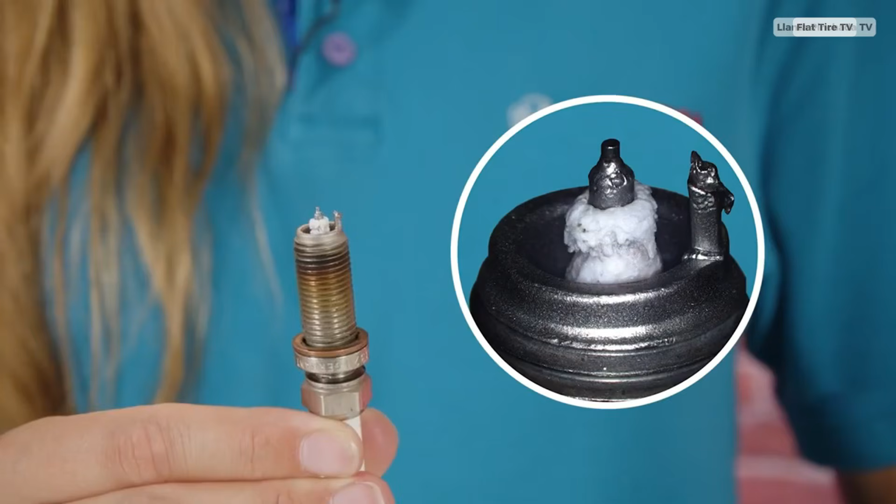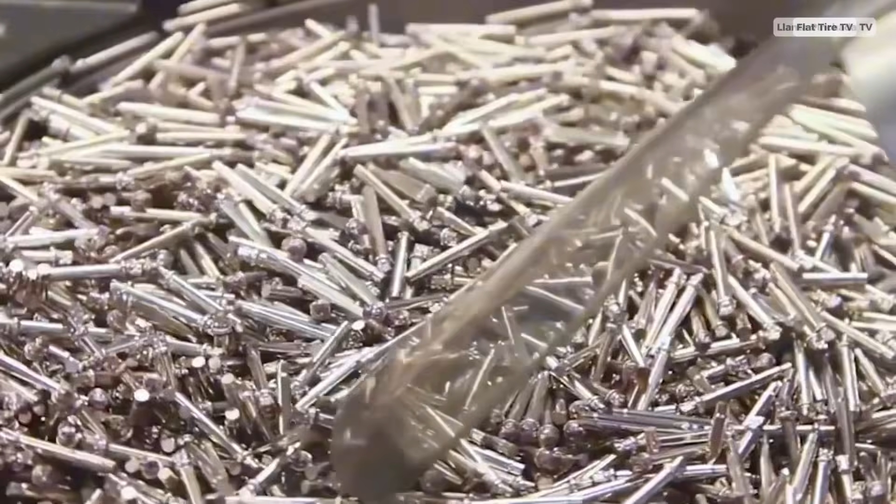Choosing between expensive or cheap spark plugs might seem like a simple decision, but in reality, it's one of those topics where most people think they understand the difference and end up getting it wrong, because there's a common belief that paying more automatically improves engine performance.

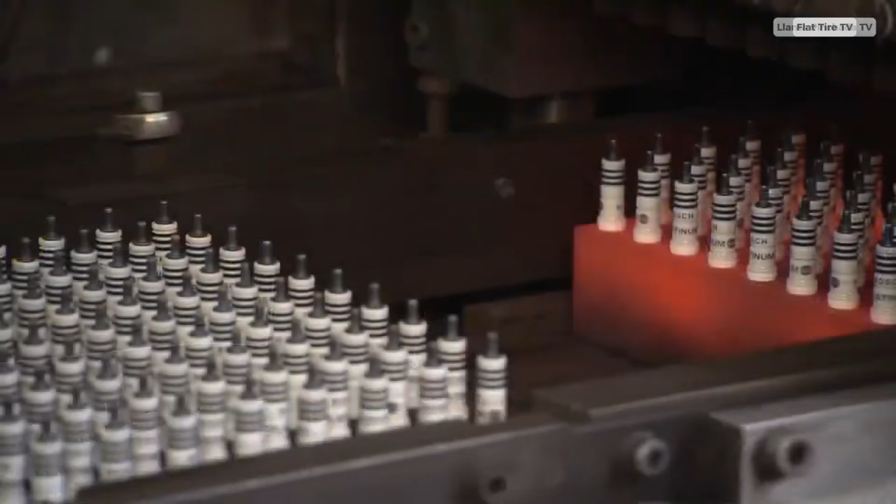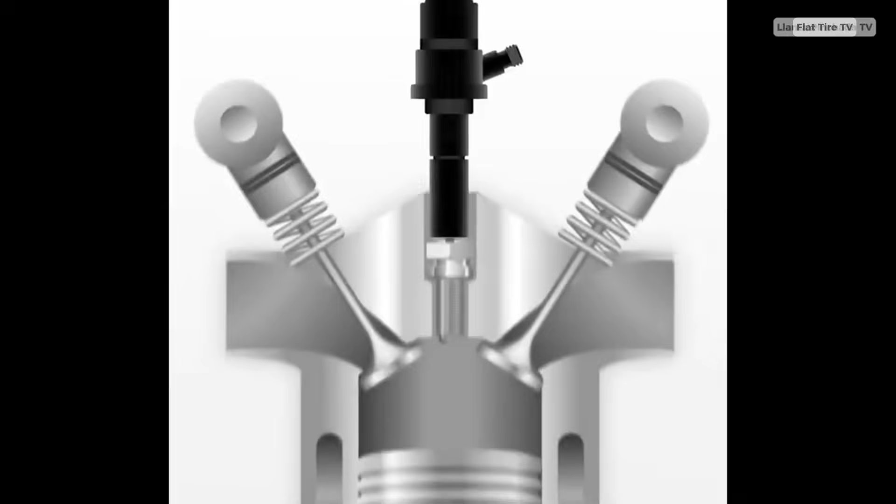So in this video, I'm going to explain whether it's actually worth spending more, how spark plugs really work, what changes between different types, and the clear signs that they're no longer working properly. Stay until the end, because I'll show you something almost no one checks when replacing them, and how to fix it, since it can ruin performance, increase fuel consumption, and cause brand new spark plugs to fail prematurely.

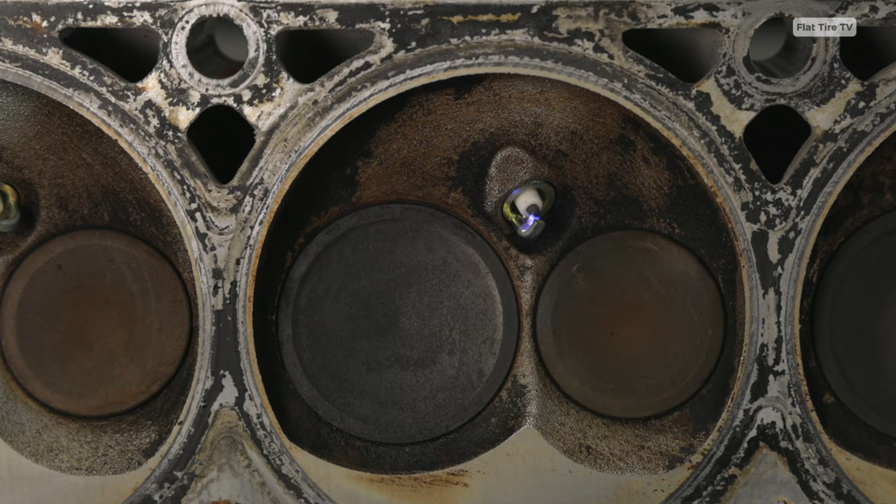Inside the cylinder, the engine compresses a very precise mixture of air and fuel. That mixture cannot ignite at just any moment or in any way, because if the spark arrives late, weak, or poorly positioned, the explosion won't push the piston the way it should.

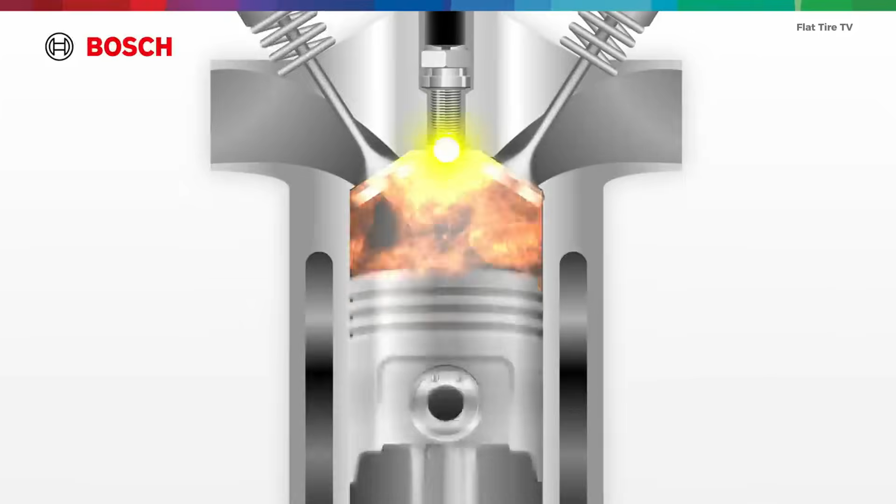That's where the spark plug comes in. It generates a discharge of thousands of volts that jumps between its electrodes, creating a microscopic flame kernel that then expands and burns the entire mixture.

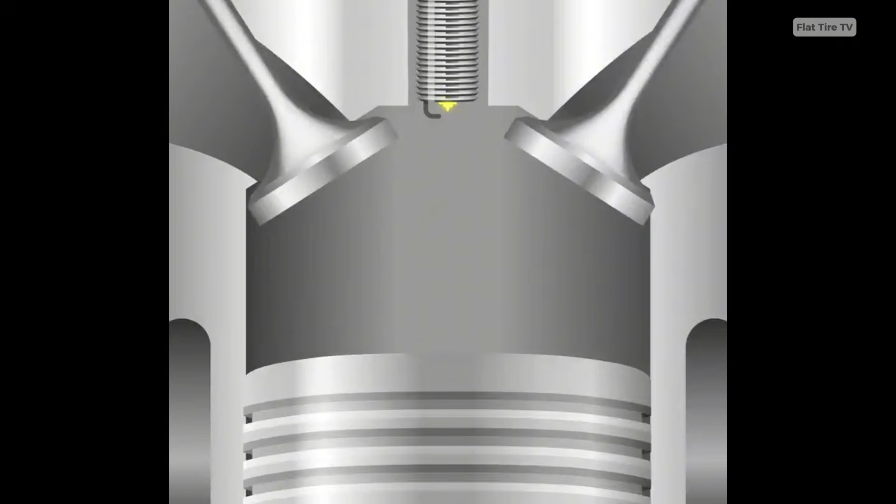But the spark plug doesn't just create a spark, it also controls heat inside the cylinder. If it doesn't dissipate heat properly, it can overheat and cause pre-ignition, where the mixture ignites too early, hitting the piston and damaging the engine without the driver immediately noticing.

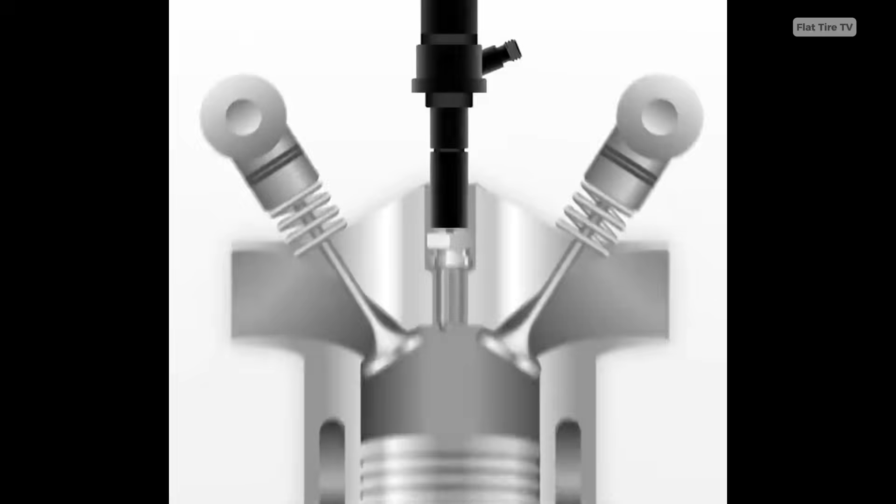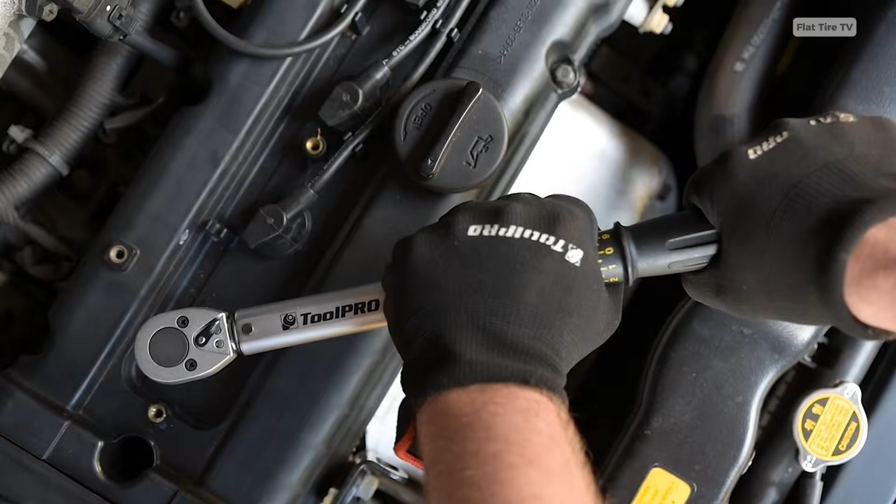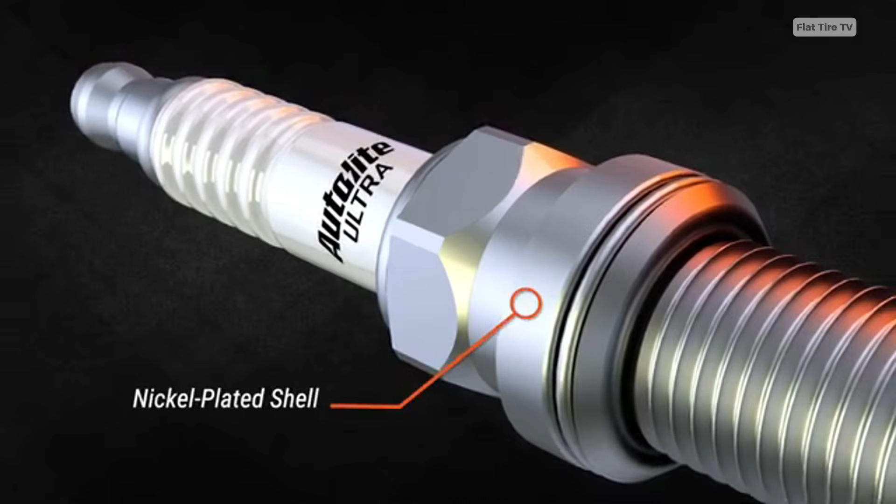In modern engines, this becomes even more critical, because the vehicle's ECU, engine control unit, expects a precise spark to match its fuel injection and ignition calculations. When the spark plug doesn't perform correctly, the ECU tries to compensate, but it can't fix a bad spark. It can only burn more fuel to mask the problem.

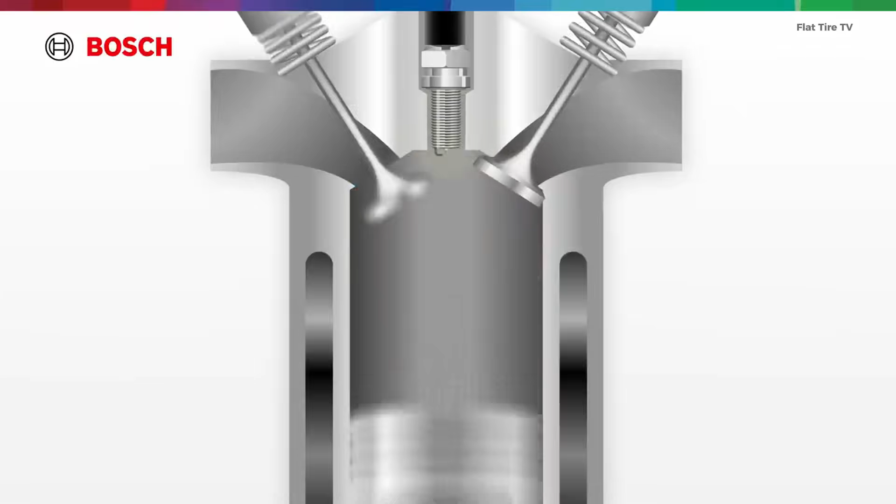Everything starts at the top, where the ignition coil or wire connects. It may seem simple, but it's crucial. It's where the high voltage enters. If the contact isn't solid or is dirty, the current won't arrive cleanly, and the spark loses strength before it even forms.

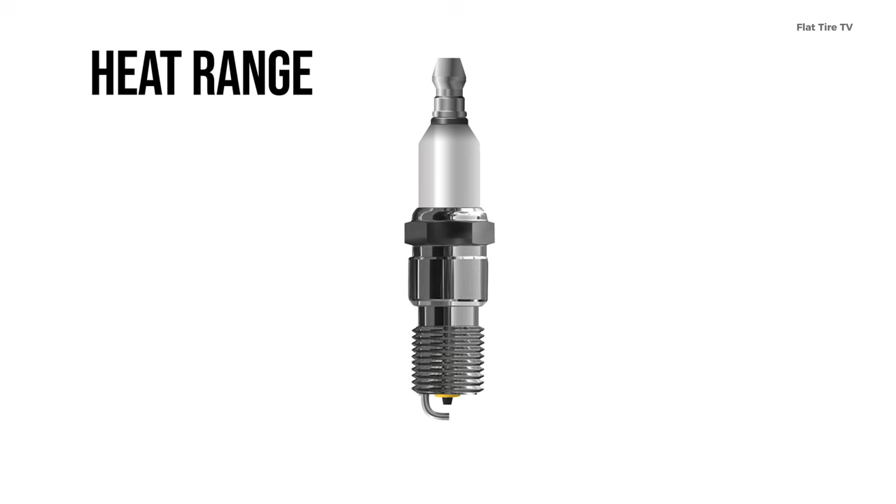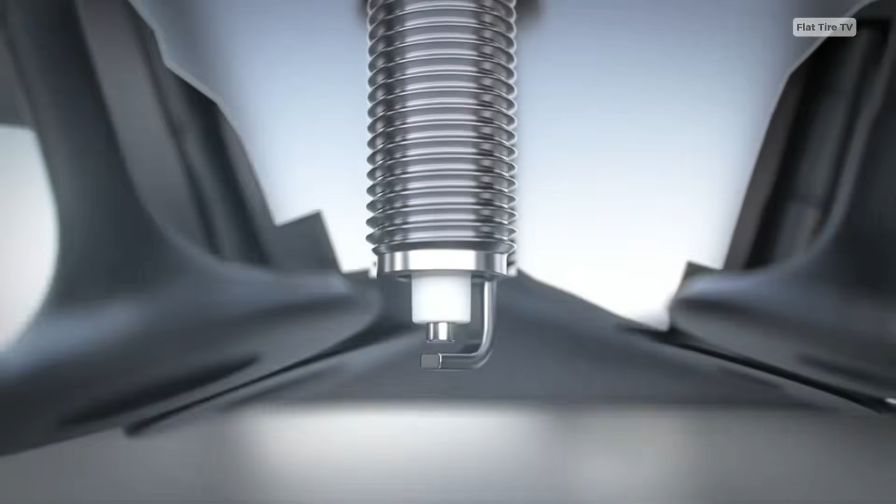From there, the electricity travels down the central electrode, which runs through the body of the spark plug. This electrode isn't exposed. It's protected by a ceramic insulator that serves two critical purposes: preventing current leakage and maintaining thermal stability. If that insulator cracks, gets contaminated, or dirty, the spark can deviate, and the cylinder may start misfiring without a clear warning.

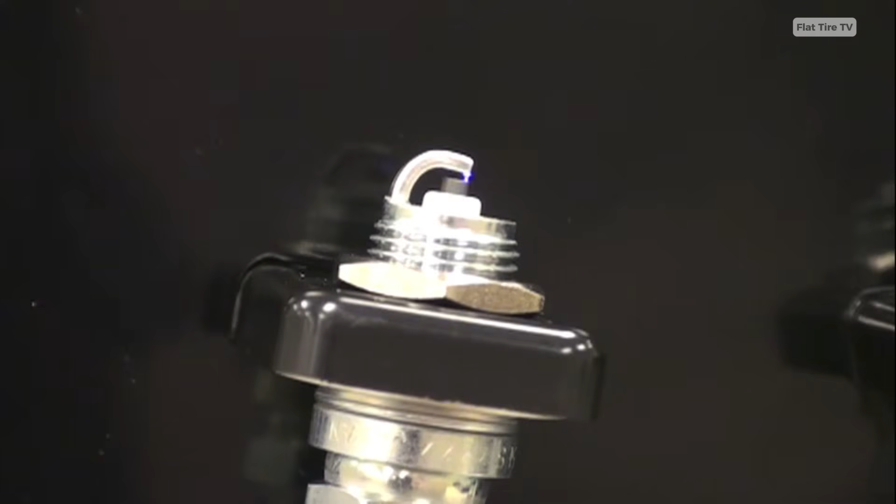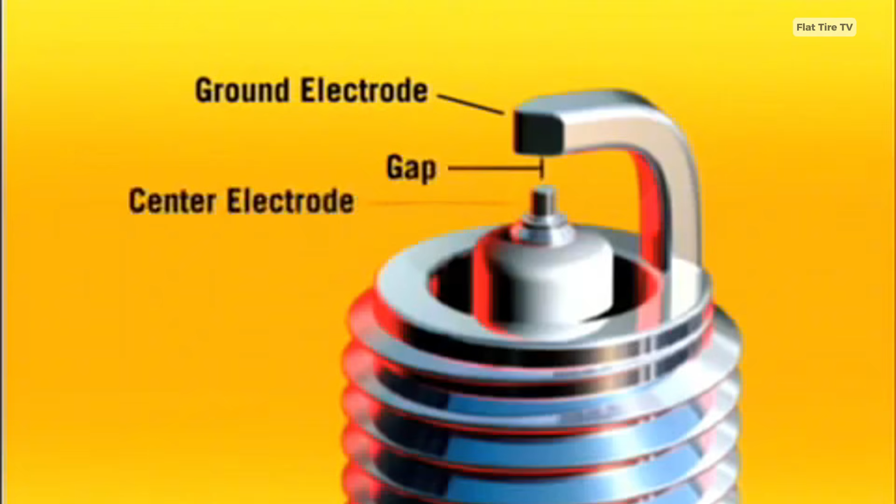The metal body of the spark plug is more important than it seems. It doesn't just secure the plug in place, it also transfers heat to the cylinder head. If heat isn't dissipated properly, the plug overheats and can trigger pre-ignition or detonation, two of the most dangerous conditions for an engine.

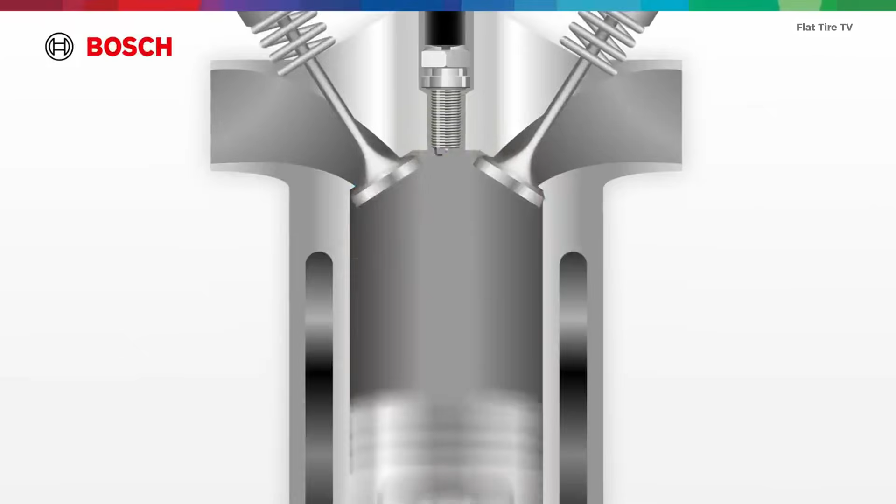At the tip is the ground electrode, the destination of the spark. Its position determines where the spark jumps and how the flame begins. If it's bent, worn, or misaligned, the spark forms incorrectly, even if voltage is present.

And between the central electrode and the ground electrode is where everything happens. The gap, that tiny space, is literally where combustion is decided, whether it starts clean and efficient or flawed and problematic.

From the outside, all spark plugs look the same, and that's exactly the problem. Many people think switching types is just about price, when in reality, each type changes how the engine burns fuel.

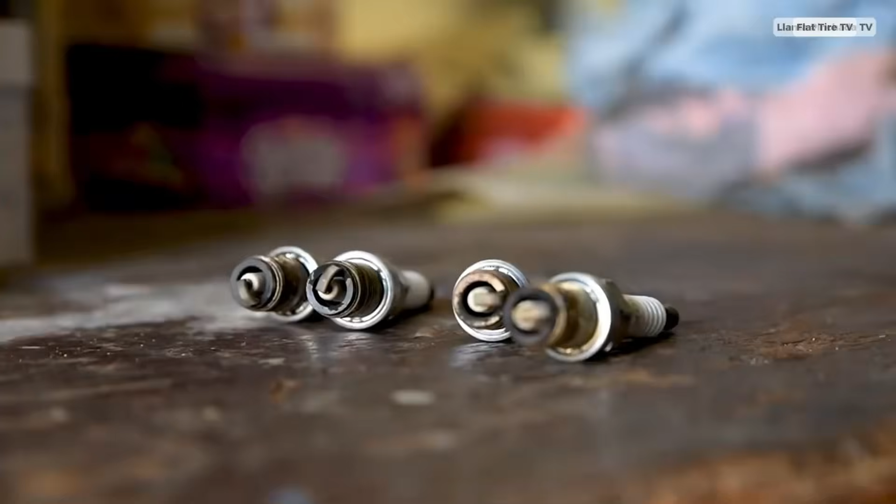Conventional spark plugs, the most common and cheapest, use copper or nickel electrodes. They work well, produce a proper spark, and do their job, but they wear out quickly. As mileage increases, the electrode gradually erodes, the spark becomes larger but less precise, and the engine slowly loses efficiency without warning. They don't fail suddenly, they just make the car consume more fuel and respond worse over time.

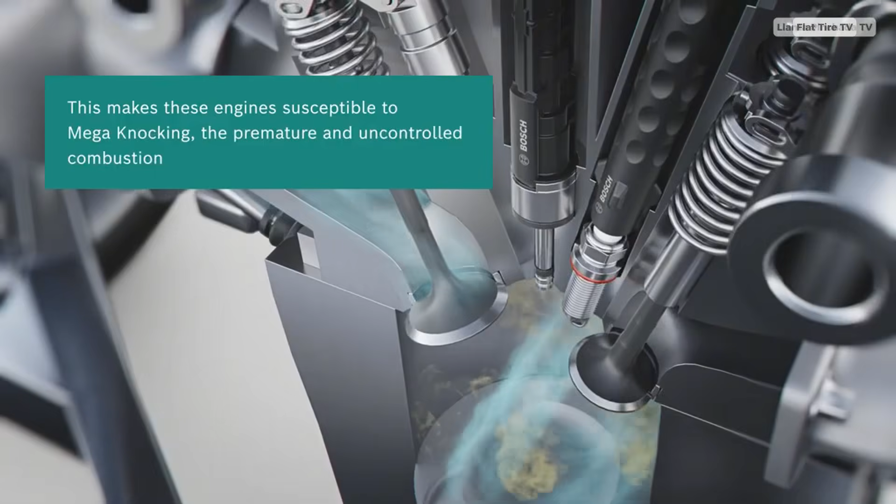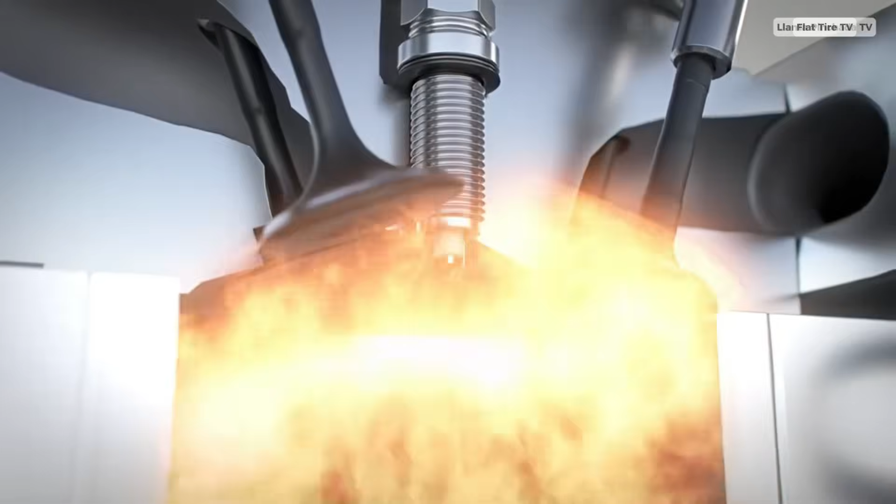Then there are platinum spark plugs, which many people believe are more powerful, when in reality their main advantage is stability. Platinum resists heat and wear better, keeping the spark more consistent over a longer period. The engine feels the same for more miles, but that doesn't mean the car will automatically be faster or more efficient. It means it won't degrade as quickly as with basic plugs.

Double platinum spark plugs are designed for specific ignition systems, especially those where the spark jumps in both directions.

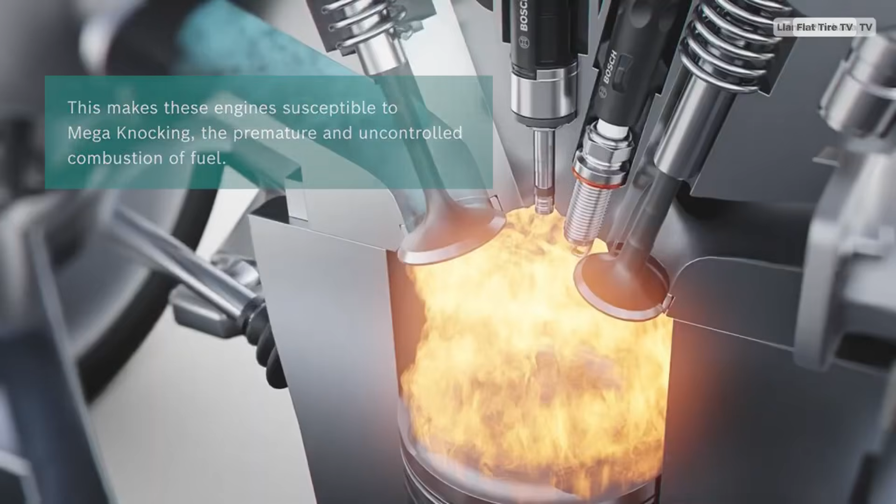Using them in an engine that doesn't require them offers no real benefit, but not using them where they are required can accelerate wear in the ignition system. This is one of the most common mistakes in workshops that install whatever is available.

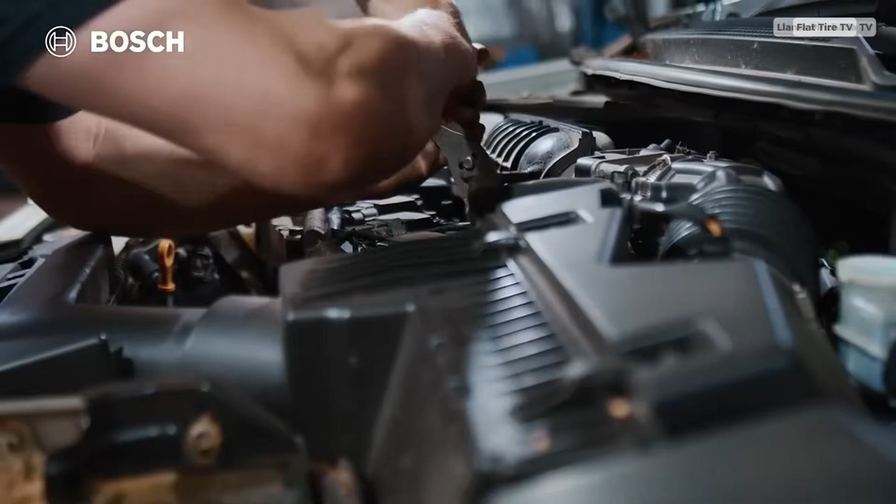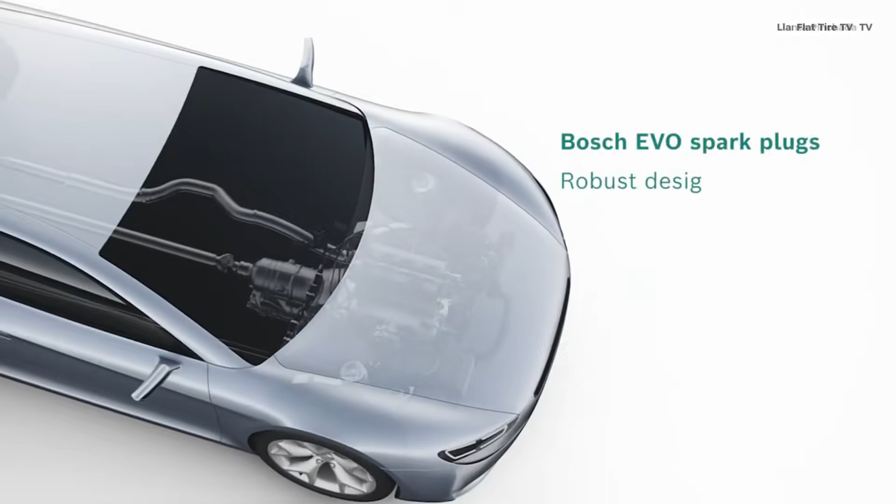Iridium spark plugs are the most misunderstood. Many people buy them expecting more power or better fuel economy, when in reality, iridium allows for a finer and more stable spark, especially in modern engines with high compression and precise electronic control. If the engine is designed for them, they work perfectly. If not, the benefit is minimal or sometimes non-existent.

Four real symptoms of faulty spark plugs that most people overlook.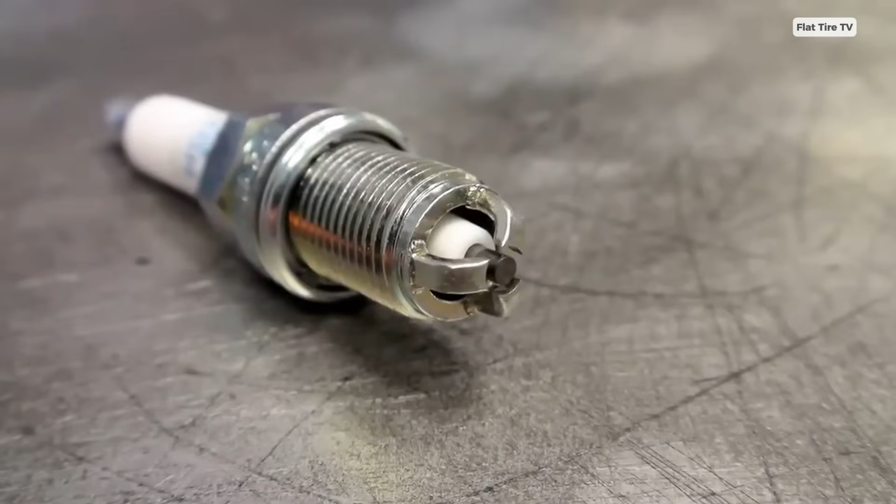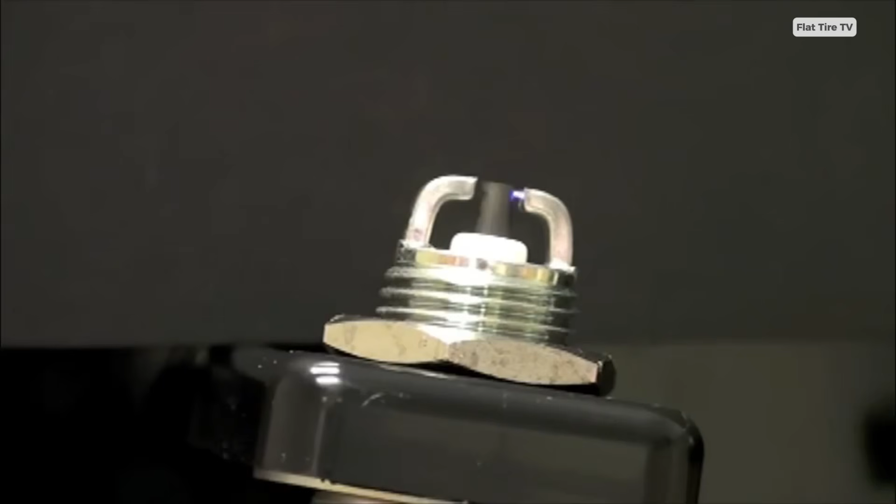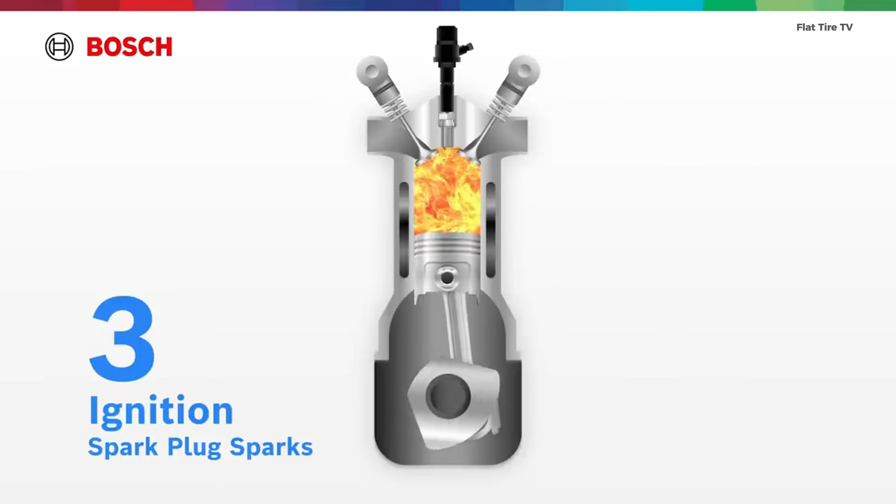The first symptom almost always appears during startup, and it's one of the most ignored. When spark plugs begin to fail, the engine needs more effort to start, especially when cold. It's not that it won't start, it does, but it takes a little longer. The engine cranks an extra second, or it just doesn't feel as clean. This happens because the spark is no longer strong enough to ignite the compressed mixture on the first try, so the fuel injection system compensates by adding more fuel. The driver gets used to it, but every start like this is already an inefficient combustion from the very first engine rotation.

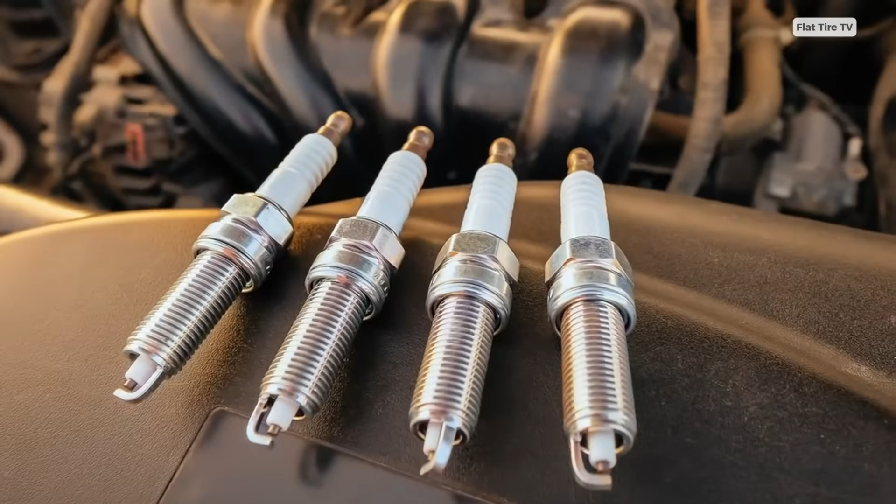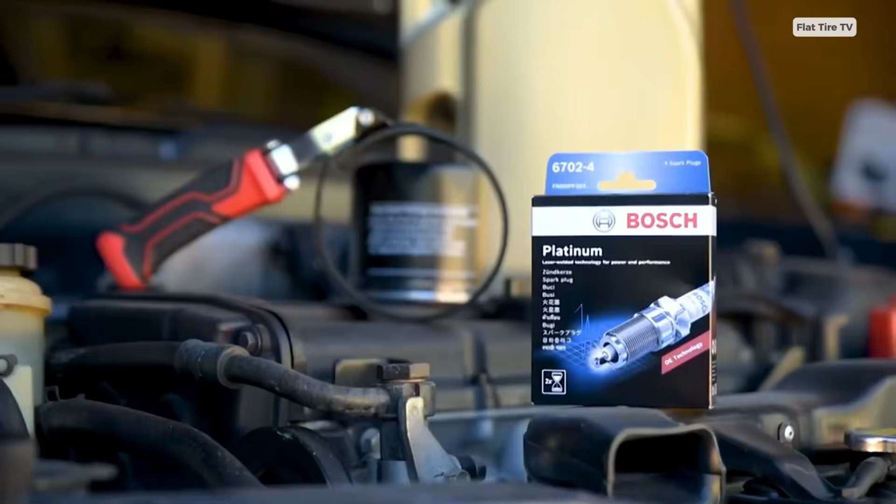The second symptom shows up during acceleration, especially from low RPM. The car responds, but with a kind of delay, as if it hesitates before reacting. It's not a total lack of power, it's an irregular delivery. This happens because one or more spark plugs aren't igniting the mixture consistently, so some cylinders push hard while others don't. The result is less clean, less direct acceleration, with a heavy engine feel, even though the problem may be less noticeable at highway speeds.

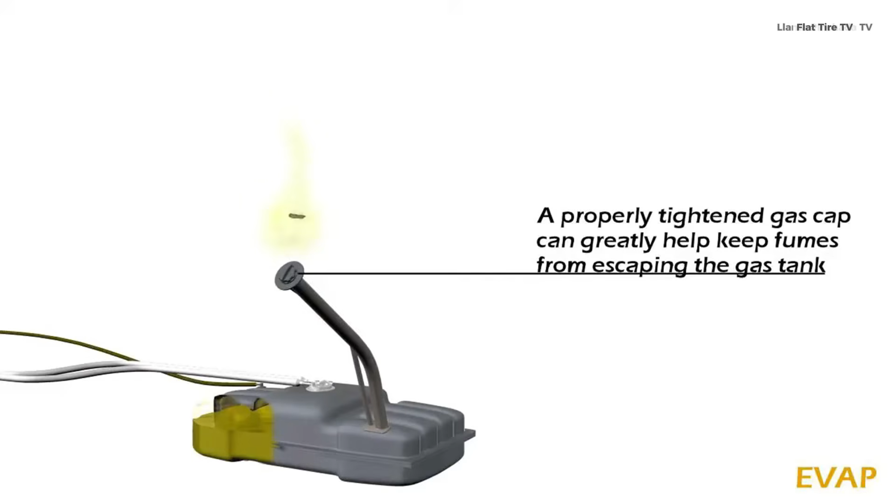The third symptom is one of the most expensive in the long run: a gradual increase in fuel consumption. When the spark is weak or unstable, the mixture doesn't burn completely, and the vehicle's computer detects this through the oxygen sensors. What does the system do? It injects more fuel to try to maintain performance. The driver doesn't feel a clear failure, just notices that the tank empties faster, often blaming traffic or driving style, when in reality extra fuel is being burned to compensate for worn spark plugs.

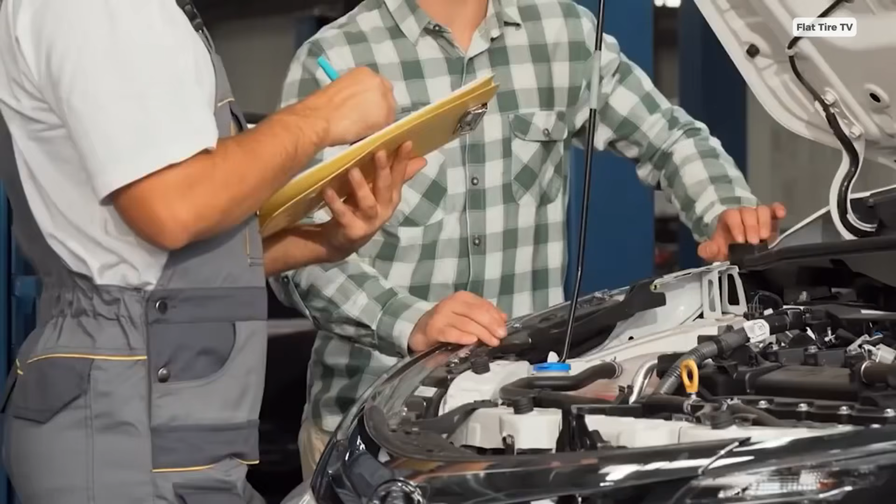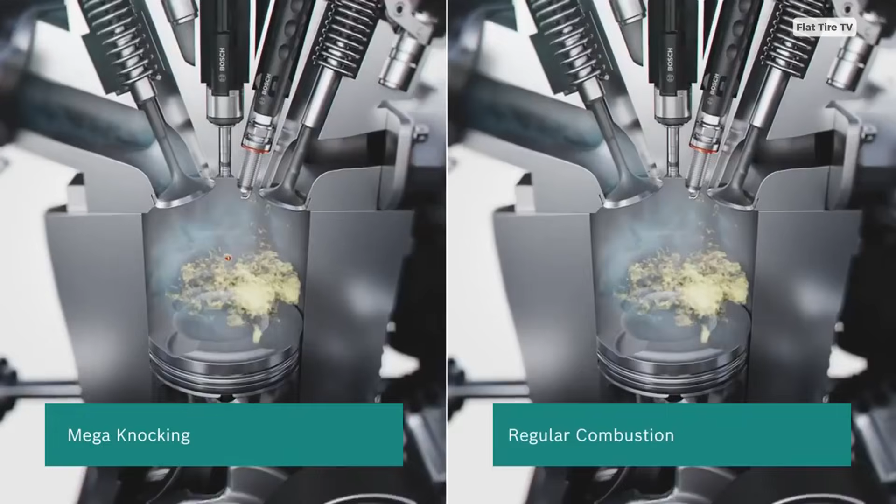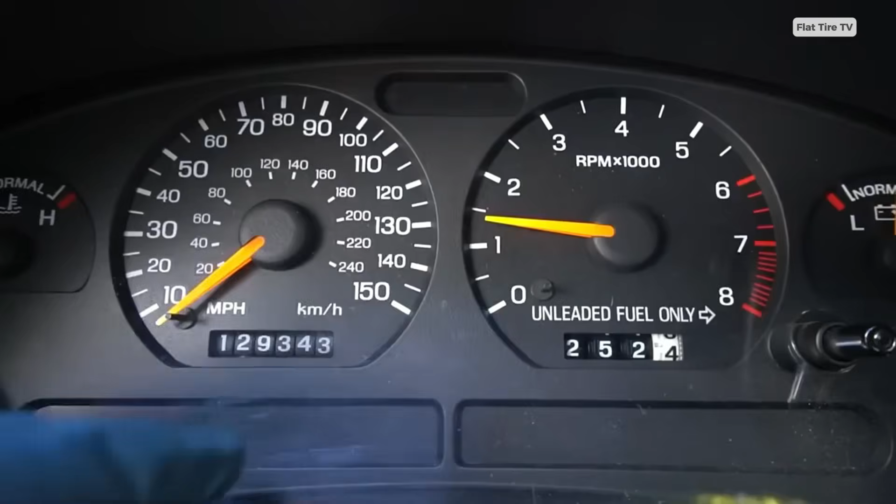The fourth symptom appears at idle, when stopped at a traffic light or parked. Light but constant vibrations. It's not a strong shake, but a subtle vibration that makes the engine feel slightly uneven. This happens because combustion isn't uniform across all cylinders. Some explosions are complete, others aren't, and that imbalance is transmitted directly to the engine block. Many people think all cars vibrate a little, but when spark plugs are in good condition, idle should be smooth and stable.

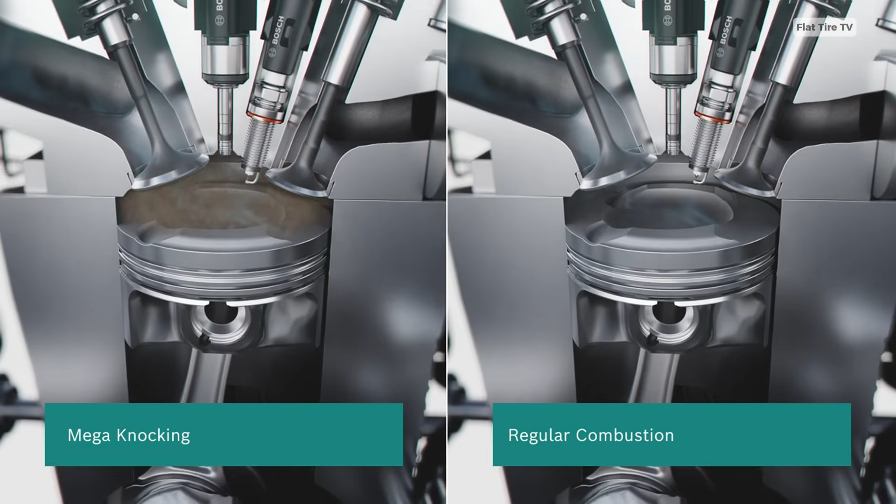The first mistake, and the most common, is believing that all spark plugs are the same as long as they fit. Every engine is designed to work with a specific type of spark plug, with a defined material, a precise heat range, and a particular spark shape. Changing that doesn't just work the same, it alters how the engine behaves.

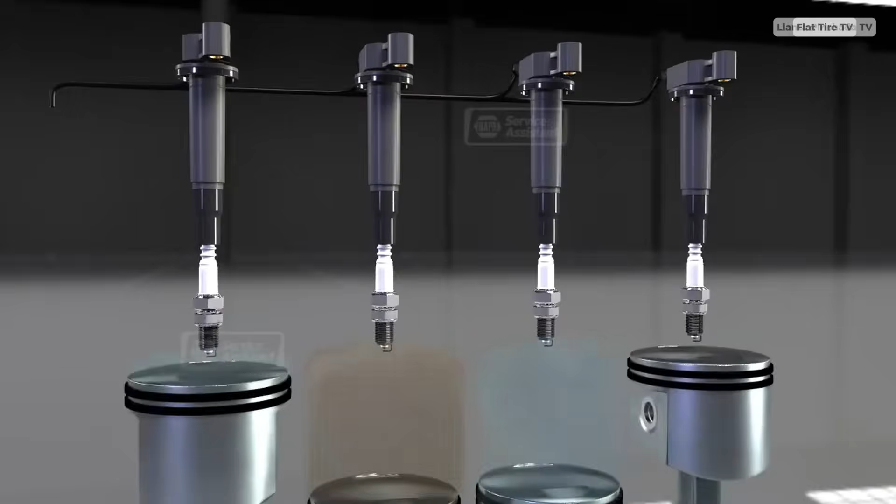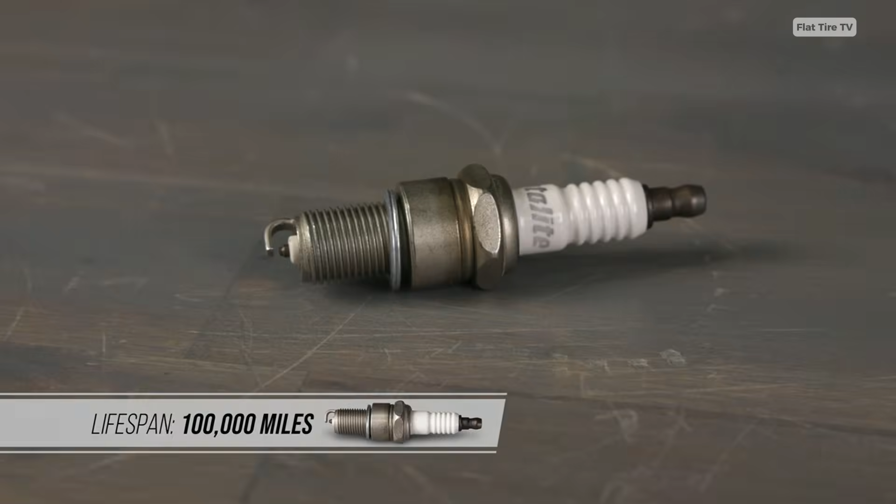Another serious mistake is misunderstanding the replacement interval. Many drivers think that if the manufacturer says 60,000 or 100,000 miles, the spark plug will perform perfectly until that exact point and then suddenly need replacement. But in reality, that number is the maximum limit, not the optimal point, especially if you drive in city traffic, make short trips, or use lower quality fuel.

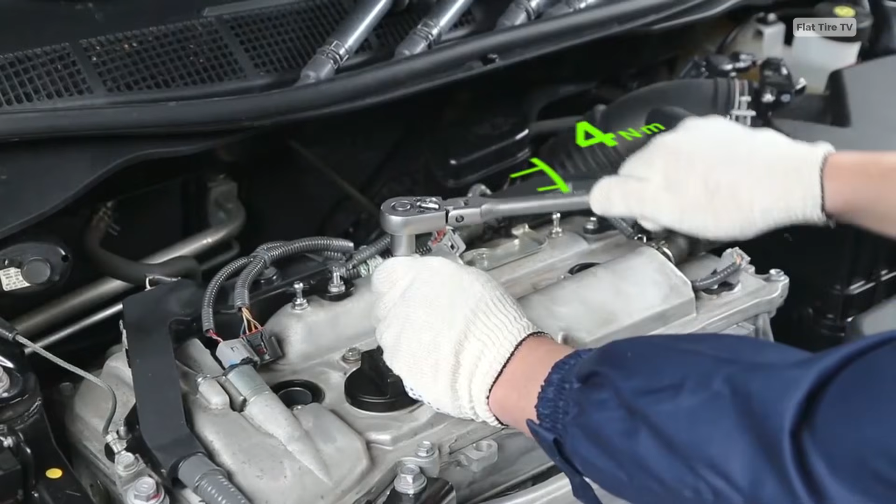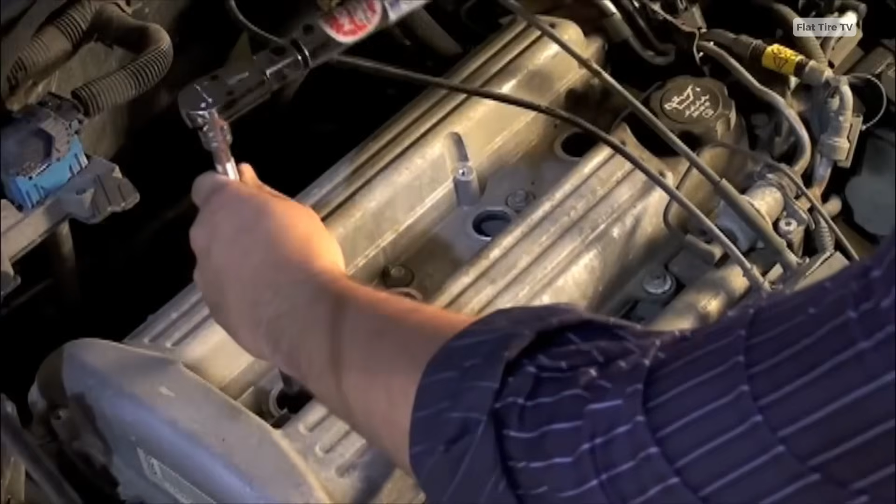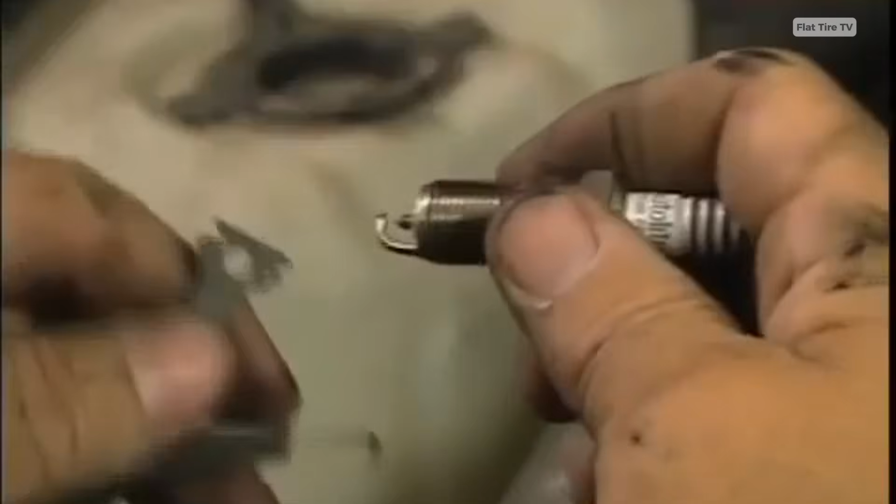Then there's the torque mistake. Spark plugs are not tightened as hard as possible. They require a specific torque setting. Over-tightening can damage the cylinder threads or deform the spark plug body, while under-tightening can cause compression leaks and overheating. Both situations directly affect engine performance, yet almost no one checks this properly.

And then comes the biggest mistake, the one almost nobody looks at, the real hidden detail.

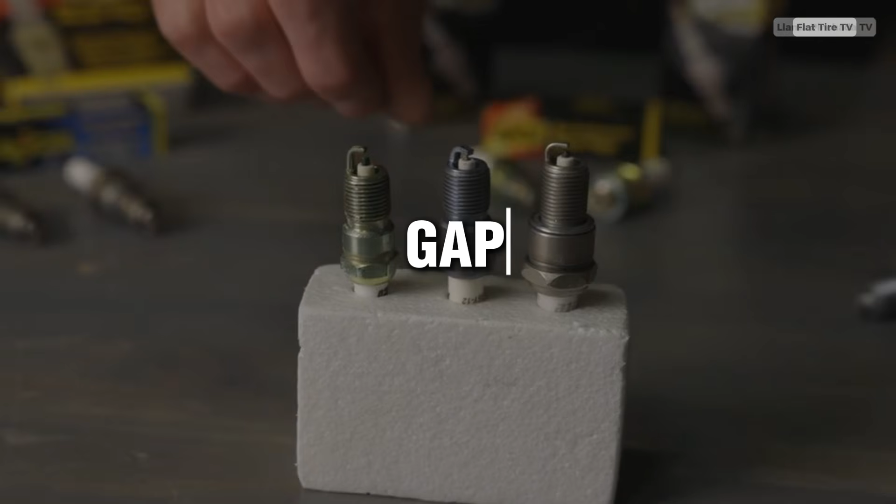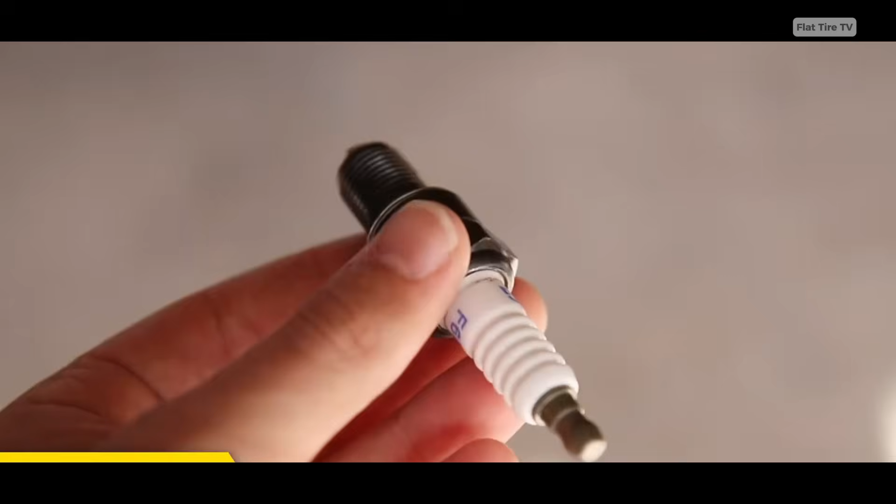The gap is the exact distance between the spark plug electrodes, and even though it may seem like a minor detail, it defines how the spark is created and how combustion begins inside the cylinder. It's not decorative or optional. It's a critical adjustment that the engine expects with millimetric precision.

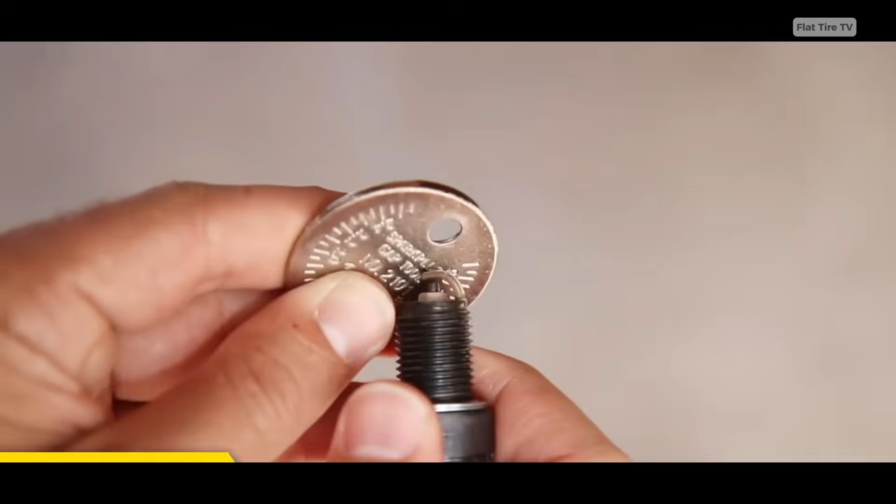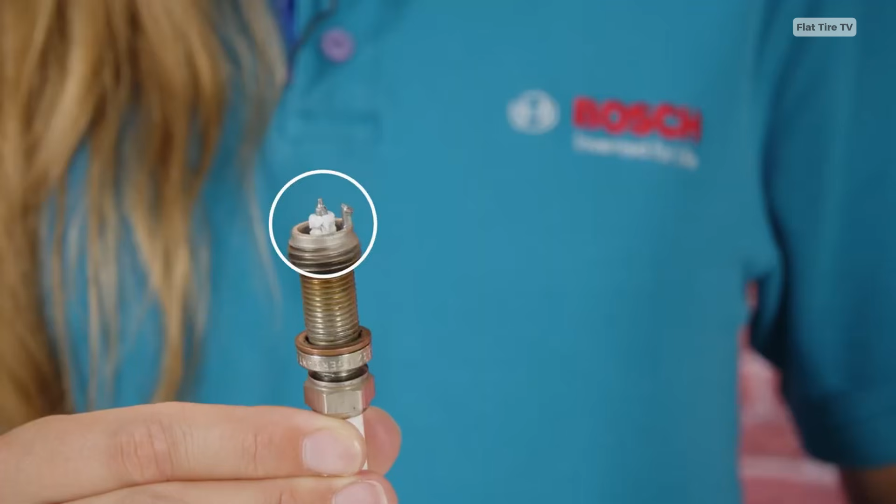When the gap is too large, the spark needs more voltage to jump. At first, the ignition system can compensate, but that extra demand puts stress on coils, wires, and modules, and the spark becomes unstable. The result isn't an immediate failure, it's irregular combustion, causing slight jerks, slower response, and higher fuel consumption, even though the car still feels normal.

If the gap is too small, the spark jumps easily, but it's weak and short. The mixture ignites, yes, but it doesn't burn evenly or completely. This leads to incomplete combustion, residue buildup, and reduced engine efficiency. The driver may not notice a clear failure, just that the car doesn't pull the same and fuel consumption starts increasing without an obvious reason.

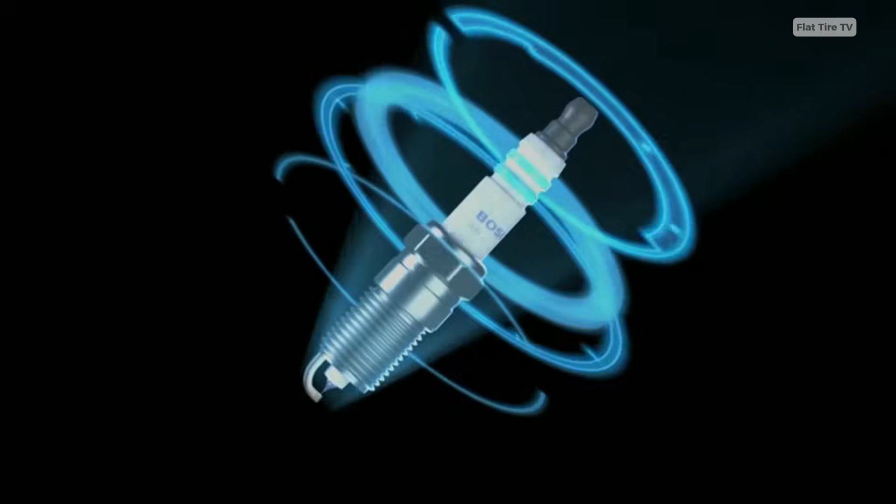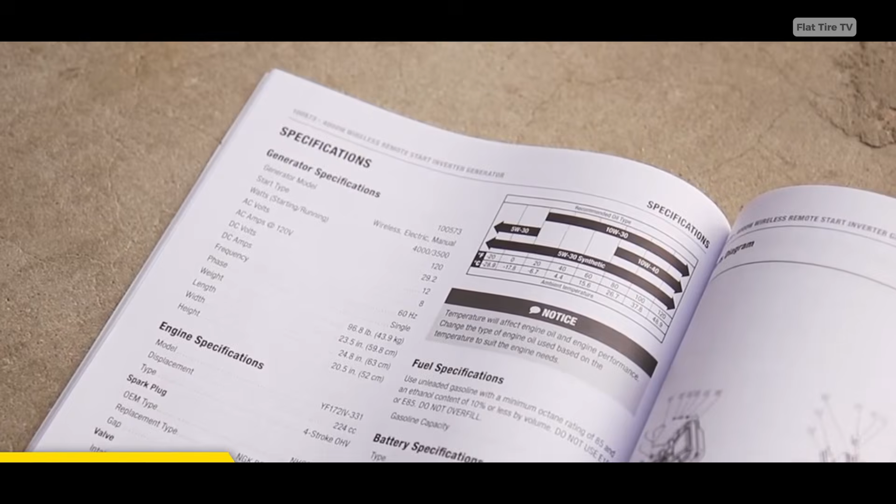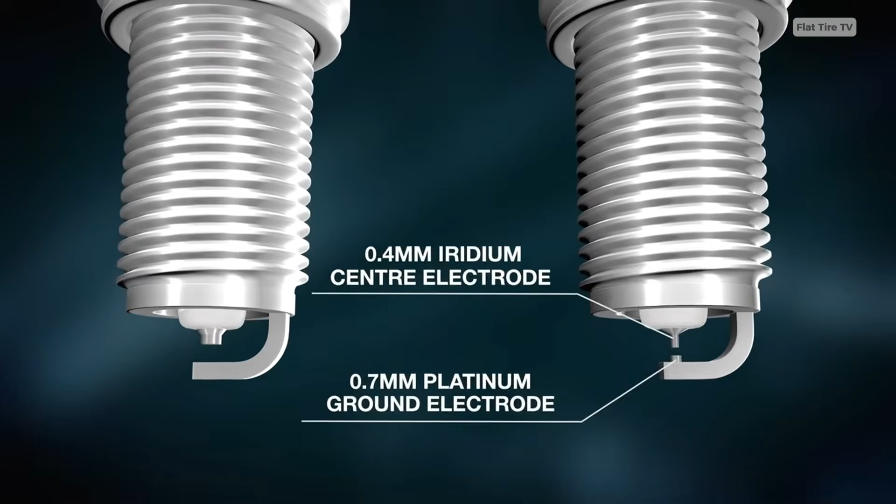Many spark plugs come pre-gapped, but transport, handling, or even the engine type can make that setting less than ideal. And in modern engines, even a small variation in the gap is enough to significantly affect ignition performance. Also, the gap is not universal. Every engine has a specific value defined by the manufacturer, calculated based on compression, ignition coil characteristics, and combustion chamber design. Adjusting it by eye or using the same value for every car is one of the most common mistakes, even in workshops.

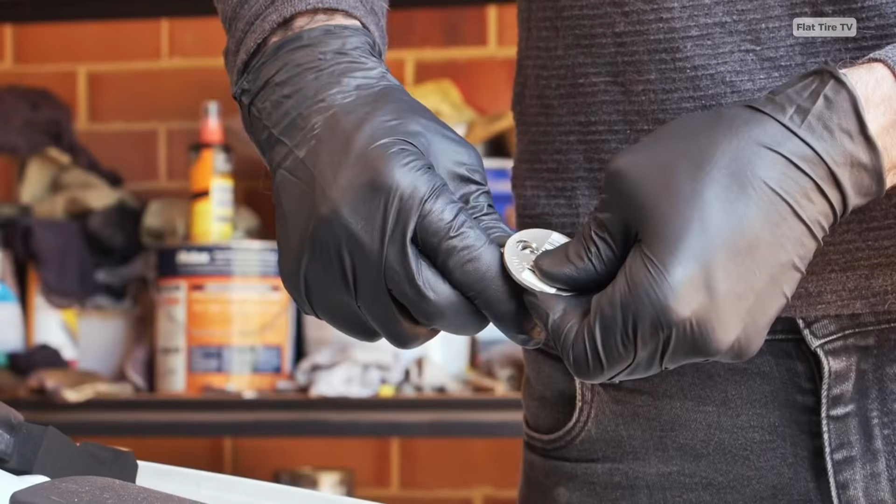And here's the part almost nobody tells you: a correct spark plug with the wrong gap will perform worse than an old spark plug that's properly calibrated. That's why some people replace their spark plugs and feel no improvement, or even think the car got worse.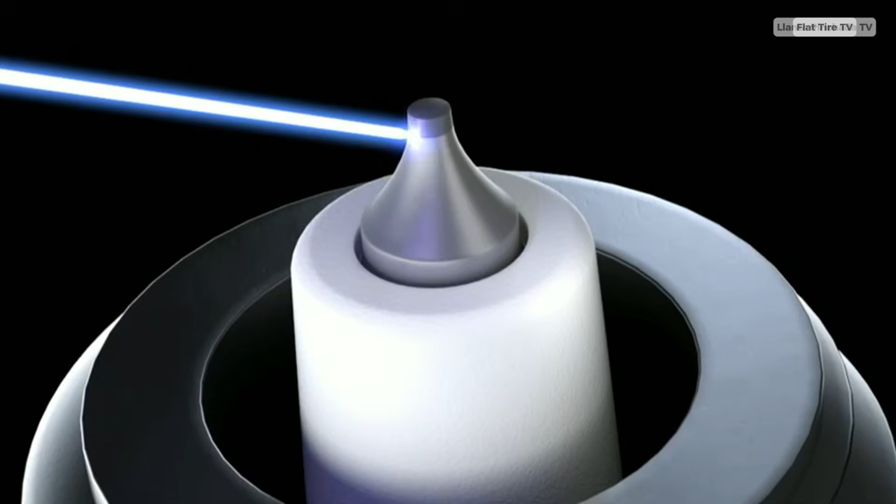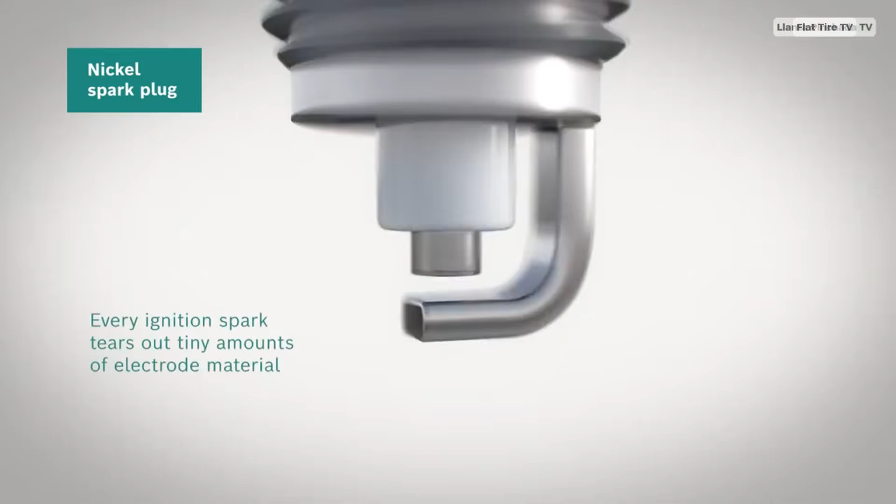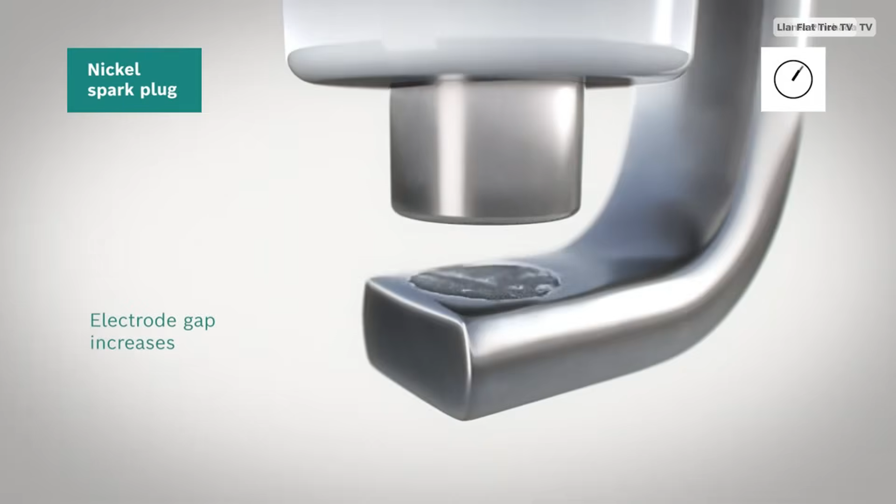To truly understand it, you have to start with the basics. All spark plugs, regardless of price, perform exactly the same function. They generate the spark that ignites the air-fuel mixture inside the cylinder. That means that, under normal conditions, both a budget spark plug and a high-end one can make the engine run properly, as long as they are the correct type for that engine.

The real difference comes from the materials they're made of. Cheaper spark plugs typically use copper electrodes, while more expensive ones use materials like platinum or iridium, which are far more resistant to wear, heat, and erosion caused by constant combustion inside the engine. This allows them to maintain a more stable spark for a much longer time.

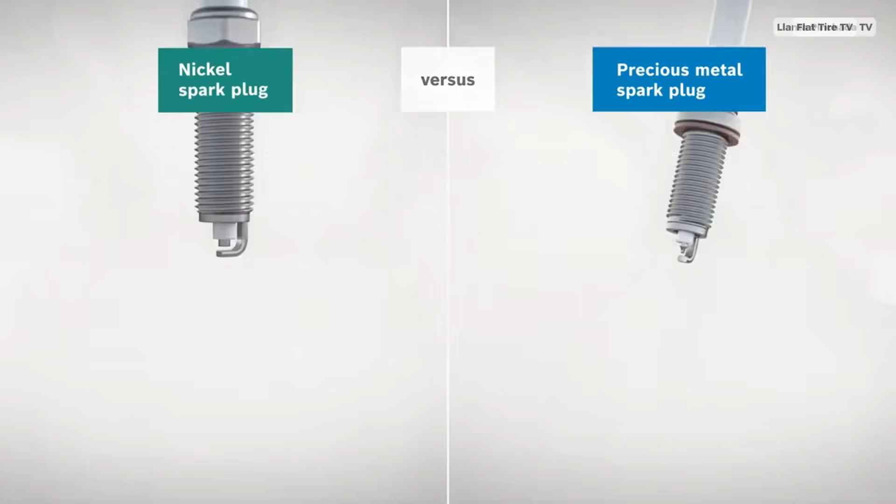This directly translates into lifespan. A copper spark plug may need replacement relatively quickly, while platinum or iridium plugs can last several times longer without losing efficiency. That means less frequent maintenance and more consistent engine performance over time.

However, this is where one of the biggest misconceptions appears. Many people install more expensive spark plugs expecting a noticeable improvement in power or fuel economy, when in reality, in a normal vehicle, the difference in performance is almost imperceptible. The engine is designed to operate within specific parameters. It won't produce more power just because the electrode material changed.

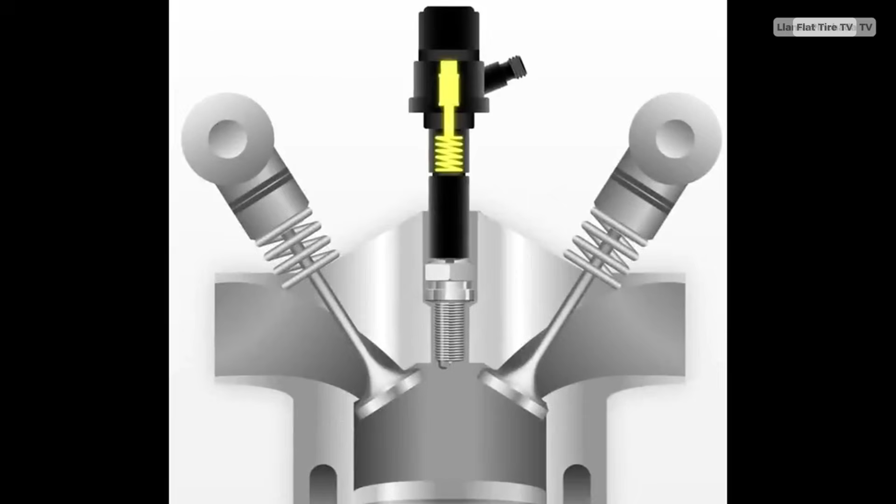In fact, the most common mistake isn't buying cheap spark plugs. It's installing plugs that don't match the manufacturer's specifications, especially when ignoring the heat range. This refers to the plug's ability to dissipate heat, and choosing one that's too hot or too cold for the engine can cause everything from misfires and carbon buildup to long-term internal damage.

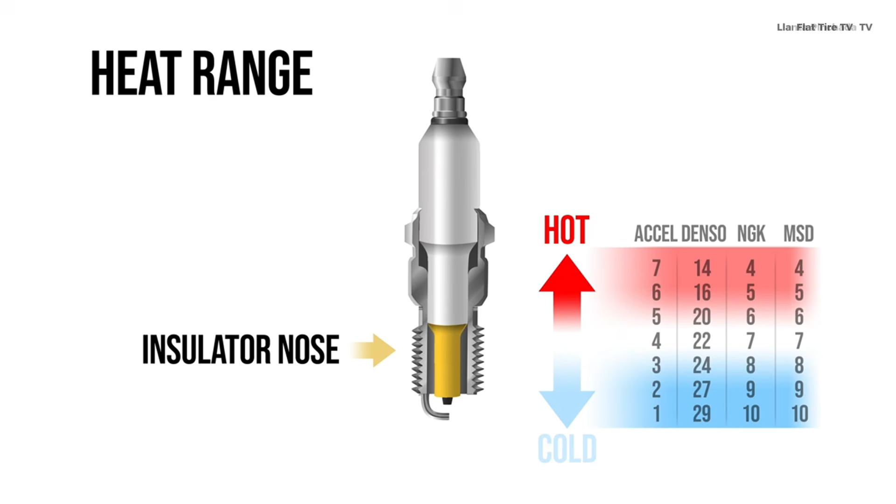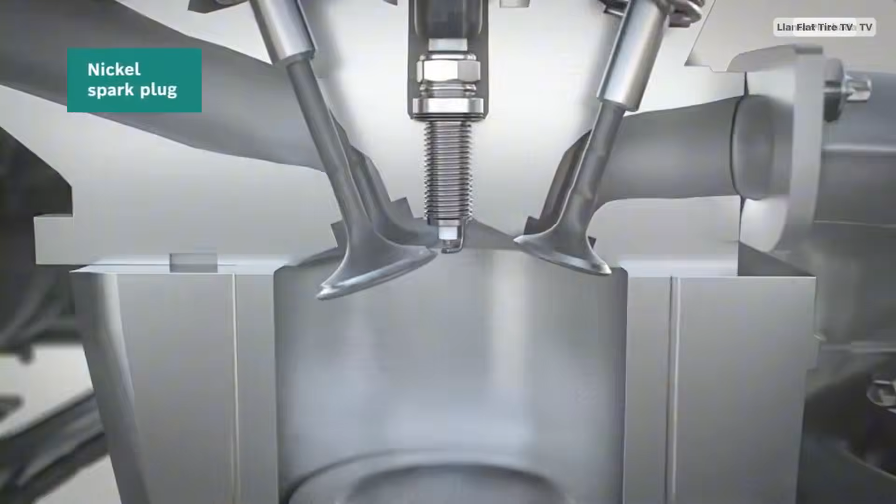That's why the right choice isn't really about price. It's about the engine type, how the vehicle is used, and the maintenance you're willing to perform. In a simple car, with regular spark plug changes and normal use, a budget option can be perfectly valid. But in modern, turbocharged, or high-performance engines, more advanced materials make sense because they handle higher demands and maintain efficiency for longer.